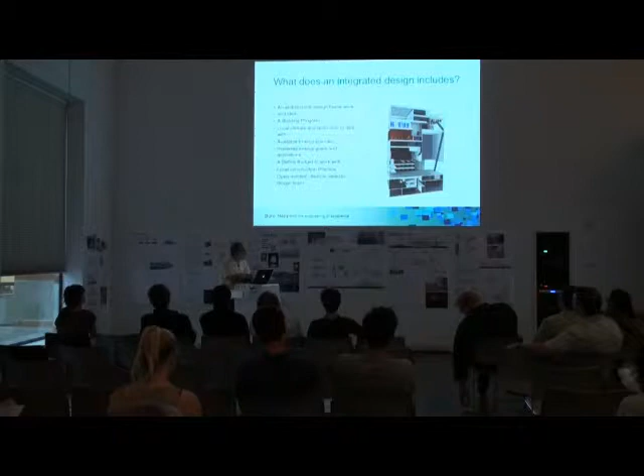These all came somewhat head-on to some degree or another at earlier stages of design, if you really need to take a look at that integrated design and see how that would work out with a typical building or atypical building, in the case of Wyly Theatre or any other highly integrated design buildings.

From our standpoint or from your standpoint, one may think that comfort is all about temperature in the building and getting the humidity out, especially if you happen to be in areas like Houston or, in my recent travel, in Doha, which is basically an intolerable climate for this type of building design. But once you really get beyond it,

a comfort design has many different aspects, and depending on the building, depending on the program, there are different things that one design has to be sensitive about or not, and it may involve many things: noise, or type of use, and areas that we need to take advantage of.

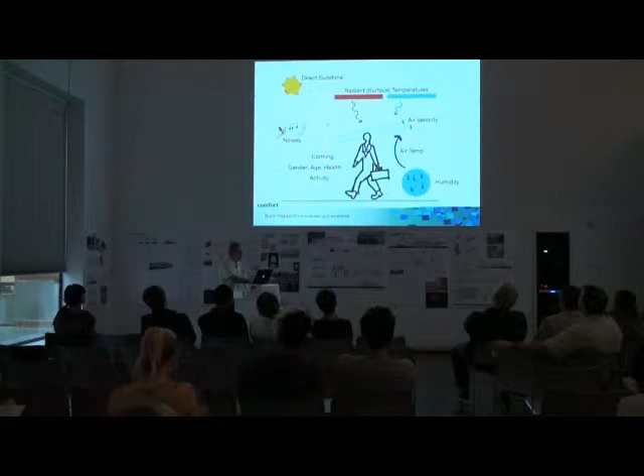Integrated design may vary one degree or another within a building and design, but just start by the fundamental questions that we as designers get involved with and pose from our standpoint to the design team. We need to take a look at the indoor design conditions, the nature of the program that produces or takes the heat out of the building, or produces the heat within the program space.

How do you conceive of providing air conditioning or comfort design for the building? And it goes on to that. How do we construct it? What are the opportunities for construction, and how do we really maintain it? What type of maintenance programs are available for the end user after the design is done? So the integrity of the design remains intact for years to come.

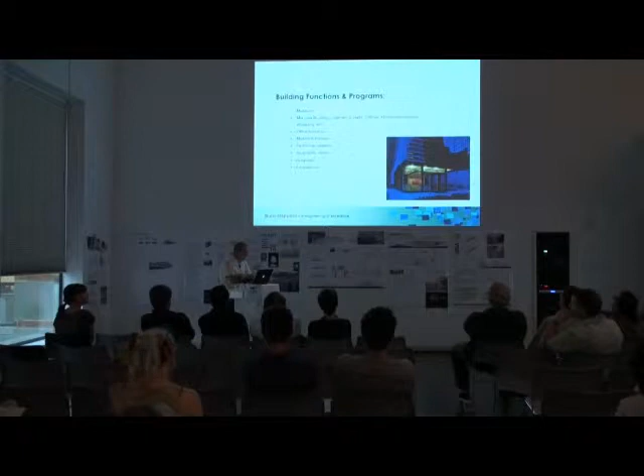For a typical construction, at this stage it is somewhere about 20, and some buildings need to be a good functional building for over 100 years at least. And of course, I think we're all familiar with the fact that there are many different building types, and each one of them really deserves its own attention, and they don't necessarily all function and work similarly.

From the building system standpoint, the critical issues that we need to concentrate on at this stage, from the comfort standpoint, are really the thermal, the visual, the acoustics. From the user standpoint, thermal is probably much more relevant, or acoustic probably is more relevant. From the architect standpoint it is the visual part of it,

and obviously for the owner or the client, really the energy standpoint: if they tend to be the end user as well, how much energy consumption, what energy value the building has later on, and what kind of cost it really has for operation of the building. So these are all critical issues to really consider for the early stages.

And then typically at the concept design, you get to see a vision that is posed by the designer and proposed for the building. And it's really important to understand how this vision works, like for example, this one was the competition rendering from SANAA for the Toledo Glass Museum. It's really a very transparent glass building.

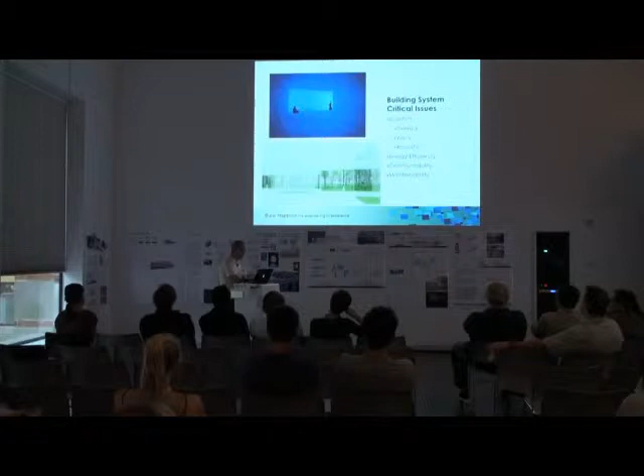This is the vision that the architect really put forward for the building at the competition, and obviously it's very conceptual, and we were tasked to see how much we can really make it a true design for a place like Toledo. So it's important to understand all these issues.

The overall fundamental task for us as building system engineers is obviously concentrated on dealing with ventilation, heating, cooling, and public health and life safety. But obviously there are some items like lighting and acoustics that at one time or another also become an issue for us.

I've come across many studios where students concentrate more often than not on just the program area design, not realizing that a building, like any other functional organism, needs all the background systems in order to function.

This background system could take up to 10%, 15% of your overall building area, depending on the design program. It's substantial. If you propose your building to the client without understanding it early on, it becomes an issue of where to really fit all these elements. So it's important to keep in mind that a successful building design takes into account all these areas from your program, and it's important not to lose track of it.

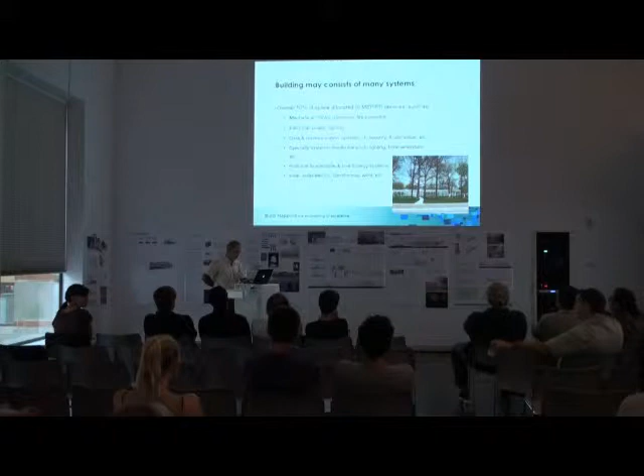A couple of issues to look at from the earliest stages, from our standpoint, is really how we make decisions about certain things. A fundamental decision is how do you supply heating and cooling to the building. These become fundamental questions early on, and it's not a decision purely made by us or you. It's a decision that would be successful to make through a joint effort with the client, because ultimately it's a long-term issue they have to deal with.

So once you look at the system and see if it's an all-air system or a hybrid system, it would impact your overall design. Depending on where you want to go, and what are the available or potential spaces in your building design, it impacts the selection of the systems.

Fundamental question number two: if the building or design you have has somewhat exposed or unexposed structure, it will impact how you incorporate your mechanical system into that exposed or concealed structure.

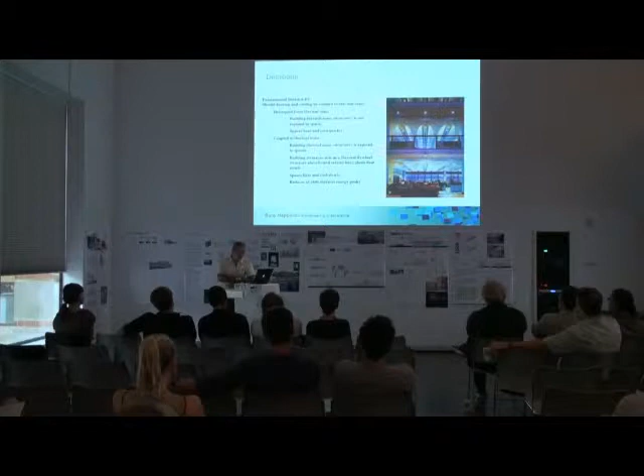So for an overall integrated design, it's important from the beginning to understand what are the possibilities and what are the potentials.

Decision number three that we usually pose and look at in the earlier stages is whether there is a potential for natural ventilation. I've come across this many times working with European architects, where based on their practice in Europe there's a much wider band of tolerance for thermal comfort within a building. They're often surprised with American designers, where a total air conditioning system is always offered, while they tend to gravitate toward a more natural ventilation design. So we need to look at the potential and possibility for natural ventilation and how it impacts not only the internal design of the building but also the external envelope. Each one provides certain answers and questions.

Getting into a little bit of the nitty-gritty of overall building systems, it's important to understand there is a substructure and a superstructure for mechanical or overall building system design. The infrastructure involves energy sources and where those come from, what type of energy sources are coming into the building, and each one will impact your design one way or another. It impacts the infrastructure of the building, areas you may not necessarily expose or show, but it ultimately becomes part of the building area that impacts your program.

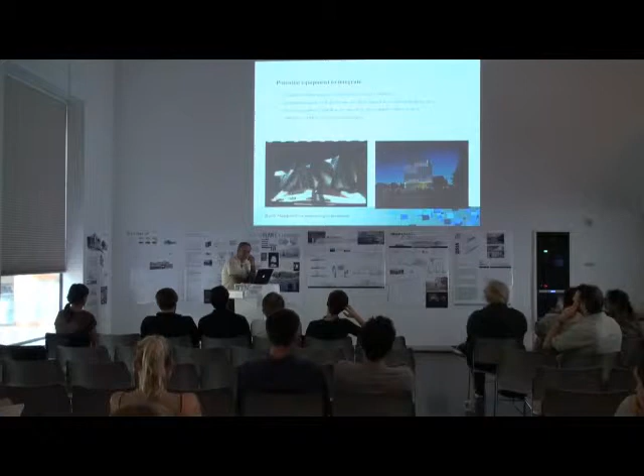There was a similar design to this by Gehry—I think at one of the universities, I forget the name right now. It was a business school where the facade was subject to really extreme temperature and rainfall, and then the temperature drop created a huge mess for post-construction, with ice build-up forming and dropping on the pedestrian area. So it was important to look at these things and see how the actual integration of the systems impacts the facade and the overall exterior design of the building.

In the case of Wyly Theatre, for example, the facade and design was such that it would not provide us with any opportunity for integration of mechanical systems, louvers, or whatnot. So for us it was important to understand how the building is conceived and what are the criteria for the cooling and heating systems for the building, and what we need to consider.

From the program, we were looking at different issues—solar panels, radiant systems, and whatnot—and each one of these was examined at the earliest stage with the designer to see what opportunities should be considered for each building.

Once you look at these things, there are a lot of environmental issues that need to be looked at, and ultimately one or another of these items becomes something we have to look at and examine overall with the designers. One or the other becomes very critical for them.

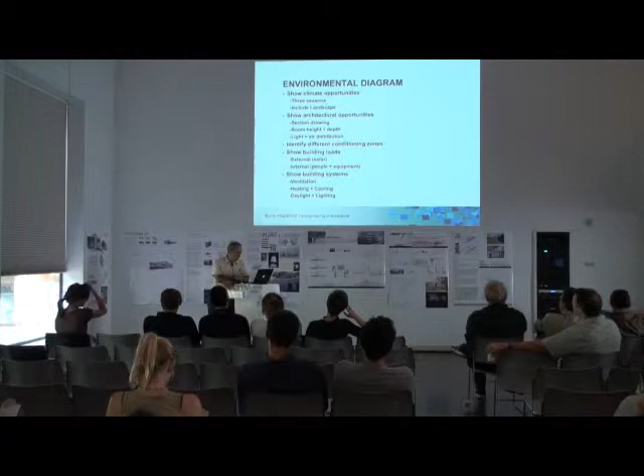So all this will be considered with the designer at the earliest stage, and then we try to really communicate the main factors with them, and work with them in earlier stages on what could be potential for integration of the mechanical system, the MEP system, into the design. It's important to communicate some of this early on to help not only shape the design and the elements, but also help increase the efficiency of the building.

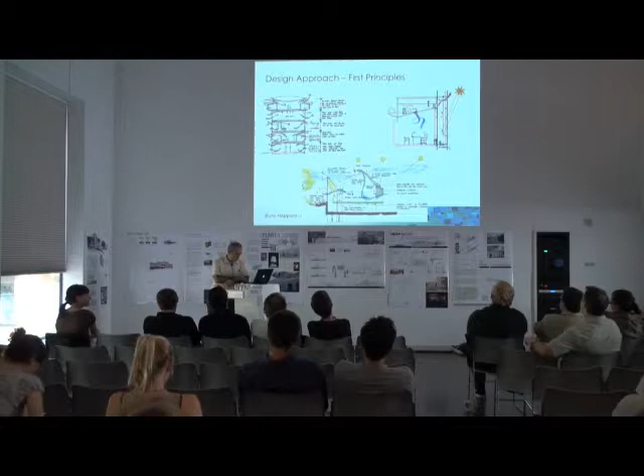Then later on, in the later stages of the design, we again evaluate and go through it more thoroughly to make sure we actually implement some of this. This is a snapshot of the Genzyme building at Cambridge, where the original concept of natural ventilation into the building was studied and looked at, and we followed it through to make sure it gets incorporated into the glass facade.

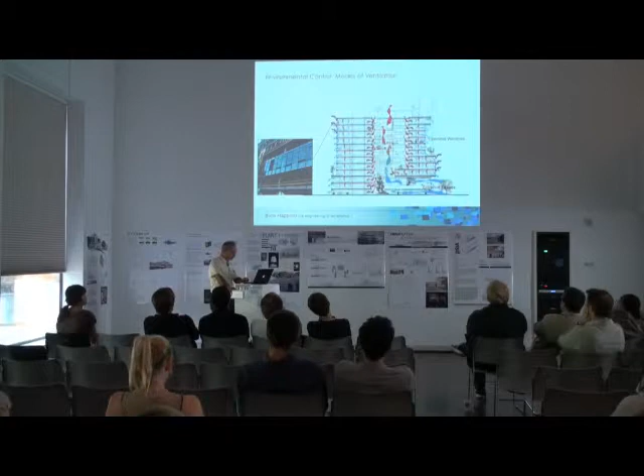The other thing I wanted to briefly go into, as it's becoming more and more an issue, is how do we incorporate and approach sustainable design toward the buildings. For us, it's important not to make it an add-on to the building later on, but to look at it from the earliest stages.

We start from overall elements that help establish a high-efficient passive design, then add potential efficiencies to the system as possible, and then look at the basic potentials for renewable sources that we can add to the building and to the design. So it's important to understand that a high-efficient building should really start from its actual inherent architectural design, then move forward to a high-efficient system, and then to renewable sources.

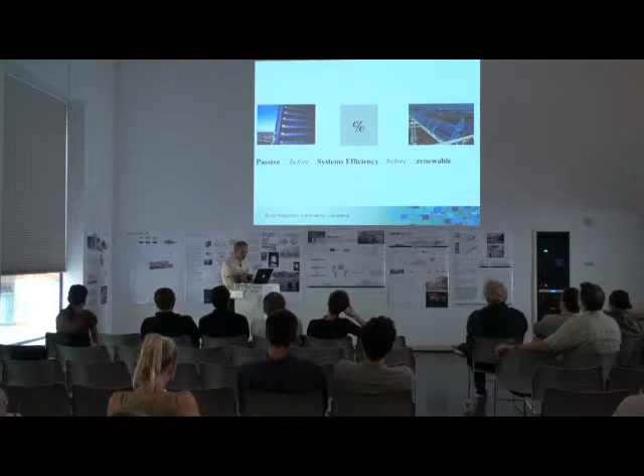So we look at this from the beginning, from the benchmarking and modeling of the system for energy modeling. What is the base design for the area, for the overall region, for the locality? And then we add the passive system, or look into the potential passive system for the area.

For example, in cases of design in very hot and dry climates, such as the Middle East, it's important to understand the passive design and take advantage of it as much as possible. External shading or overall envelope design that provides very high performance is really critical, because although the cost of energy consumption is low, the overall energy consumption is high for a typical building. So ultimately it becomes an issue.

Then, obviously, we'd like to look at the active design elements to reduce that overall energy cost and provide a highly efficient system as much as possible, and then look into renewable sources of energy. These are all elements that ultimately drive the overall consumption of the building down as much as possible, and bring it down to the goals beyond the future 2030 energy model.

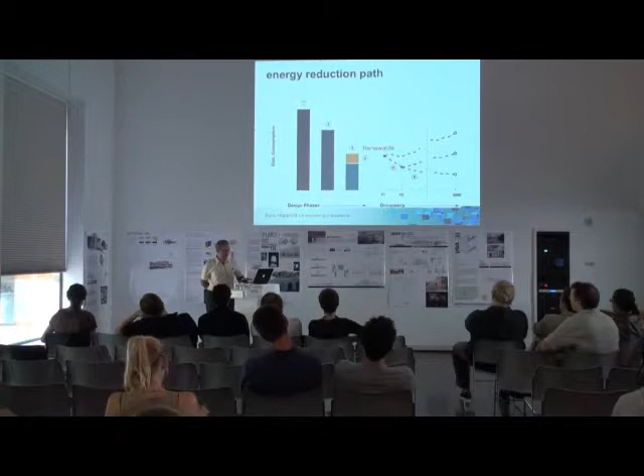As far as the relevant climate controls for the building design, once you look at the building, there are different categories and different requirements. Just as a note, if you look at a historical preservation design or exposed structure, that's one way to look at it, and those are sensitive issues that need to be considered. While if it's a modern exposed steel structure, there's another way of looking at these things, and it provides us with an opportunity. So it's important to understand how we take care of climate control in a building and what type of building you have.

In case of the Toledo Glass Museum, when we started the concept design, we early on understood that it's a building that is totally exposed, totally glass, and it needs to behave differently in summer season versus winter season. Working with the architect on that building, we started developing potentials and looking at the building in a way that helps us integrate design as much as possible from a mechanical standpoint, while making sure the building operates properly. One of the things we started to look at is really the envelope.

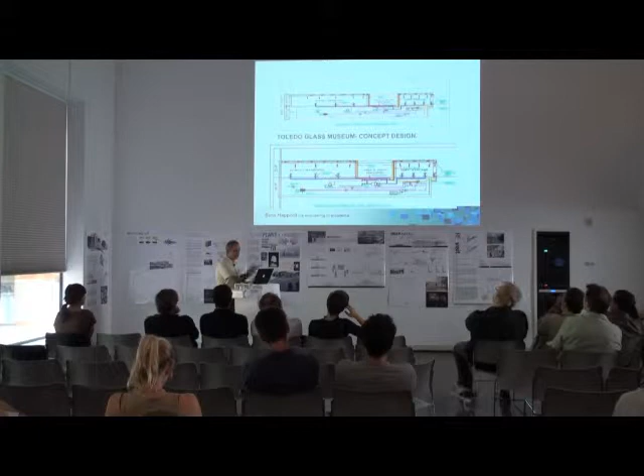But again, we put all these concepts and worked with them in order to make sure that everybody understands what the design criteria are and how we can mitigate and incorporate the design elements into their design, so it doesn't become an overall extension, and instead becomes part of the design.

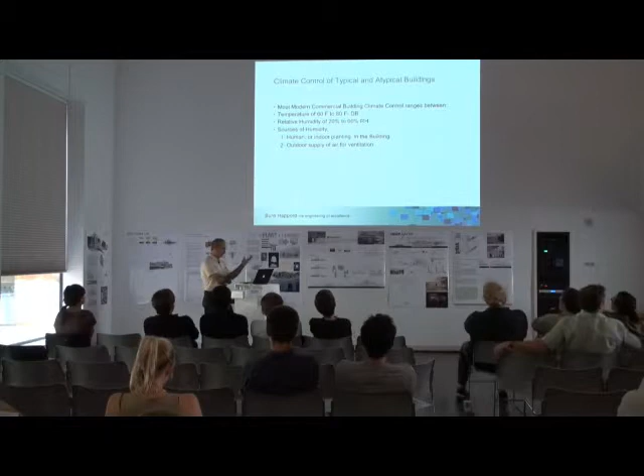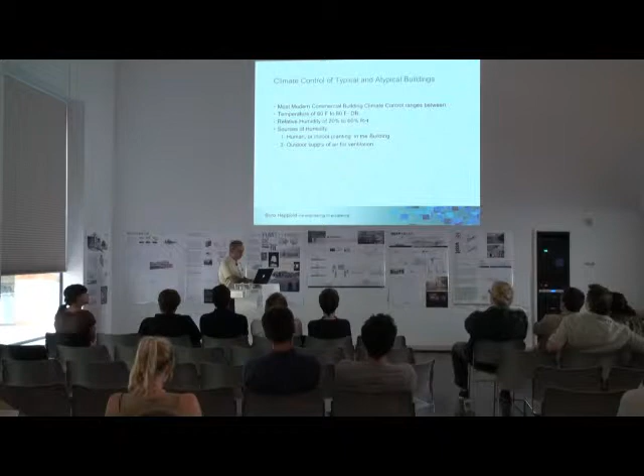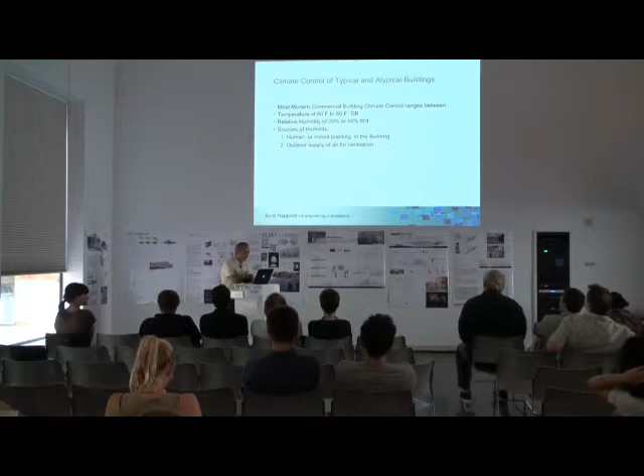So just as a start of evaluation, a building typically has certain design parameters. The temperature is roughly about 60 to 80 degrees, and for relative humidity is somewhere about 20 to 60% relative humidity. The source of humidity becomes very critical - it's either indoor, from humans and plants inside the building, or from the outside air, and how humid the outside air is. Those are the issues I just wanted to point out to you guys.

The typical building that we used to design, or ideas we used to design, was to provide total isolation of indoor versus outdoor. That's usually the approach we used to take as far as building design is concerned.

But as we're getting more involved with the high cost of energy consumption for the building, we tend to look at buildings in a way that moves from a tight area for climate control to a much wider band of area where climate control is relevant, trying to work with the architect early on, programmatically, on how to lay out the areas that work with these parameters better, so we can reduce the overall energy cost of the building.

Just again going to the example of Toledo, we had basically a double wall glass areas with a cavity in here that worked as a buffer zone for our climate control, and it not only provided climate control for the building, but also provided areas, in places like this, which was a shop area, to isolate that area from the outside.

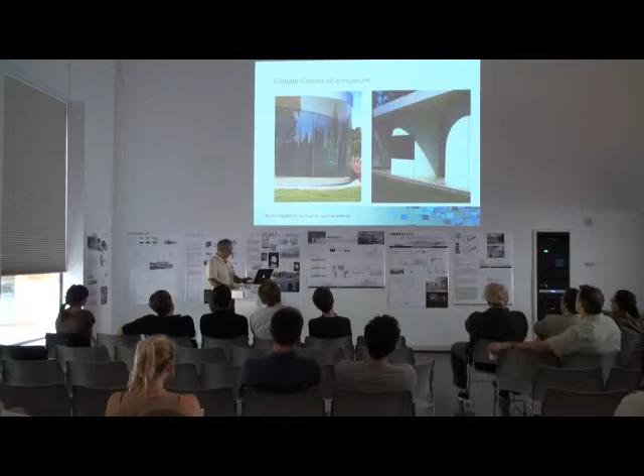The other thing that we were working on at Toledo was the challenge of one side of the building. It's really overall galleries that needed to function based on the Smithsonian standards of 50% relative humidity. But the other side of the building was a functioning hot shop area, and these two programs are very much against each other. And within the inside of the building, we have this area, what they call the foyer in here, which is really somewhat of a buffer zone between one program and the other program.

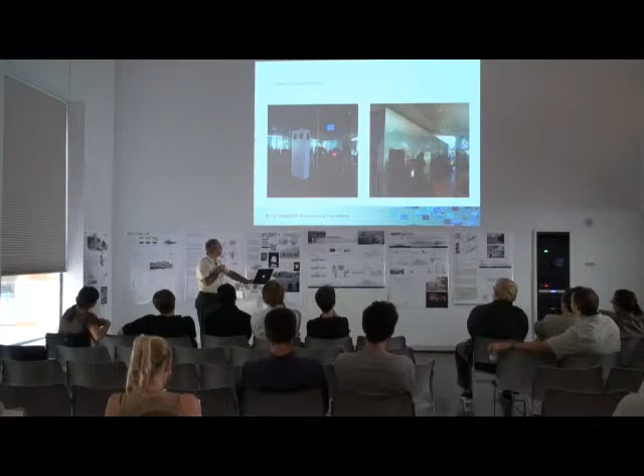But overall, the hot shop area in here was providing a lot of issues for us as far as the radiant heat into the adjacent spaces. And we needed to work very closely to see how we can mitigate that from the energy standpoint and also heat transfer.

The other thing that was really of concern for the architect is the visual aspect of the building communicating to the outside. It was very important for them to make sure that the building is a full clear glass building where visitors from outside can see what's going on inside the building, how the shops and teaching shop areas can be exposed, and viewers can see what's happening from the inside.

And that obviously forced us to locate all of our elements out of the way into the basement and try to serve all the areas from the basement level. Just bear in mind, and I'll get back to this later on, a clear glass building didn't provide us any opportunity for an area such as the hot shop, that has those kilns and elements that can produce up to about 1750 degrees Fahrenheit heat in that area. So it's something that had to be really looked at. It's not a very easy design task for us, if I can say that.

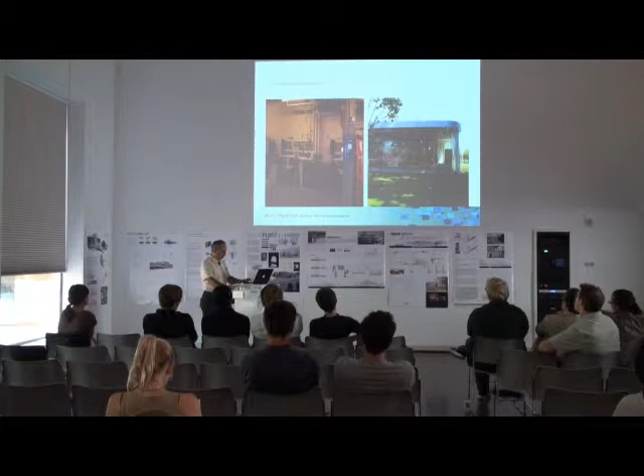One thing that we used at later stages of the design was to take advantage of CFD analysis and CFD modeling to validate our approaches to the design. We studied along with Transsolar engineers the various schemes for the ventilation of the glass and the ventilation of the gallery areas, and how we mitigate the temperature gradients across the gallery versus the outside.

This is just a snapshot of one of the final studies where, in order to minimize the overall impact of the mechanical system in the all clear glass gallery area, we were supplying from the floor as floor displacement ventilation air, while we introduced radiant floor and radiant ceiling panels in the cavity area to reduce the overall ventilation air and the amount of air needed in the cavity to mitigate the temperature gradient to an absolute minimum. Otherwise, this whole area would have been a wind tunnel, as in one of the early proposals that we looked at. So we went through different iterations of the CFD modeling to get to this.

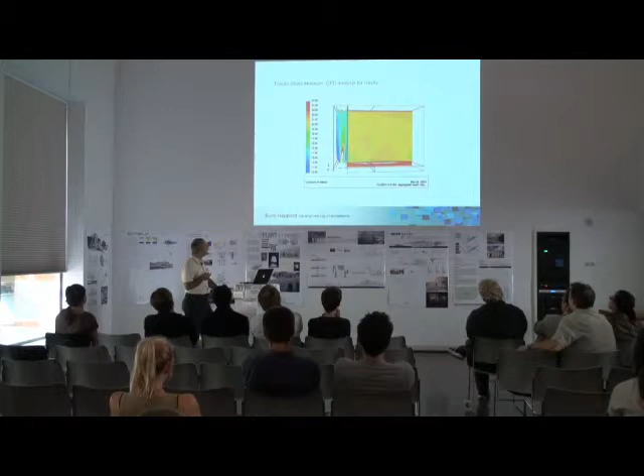And ultimately, it showed, just as a snapshot of one of the thermal gradients, how the temperature along the glass outside versus inside and the internal temperature inside the gallery behave in that mode.

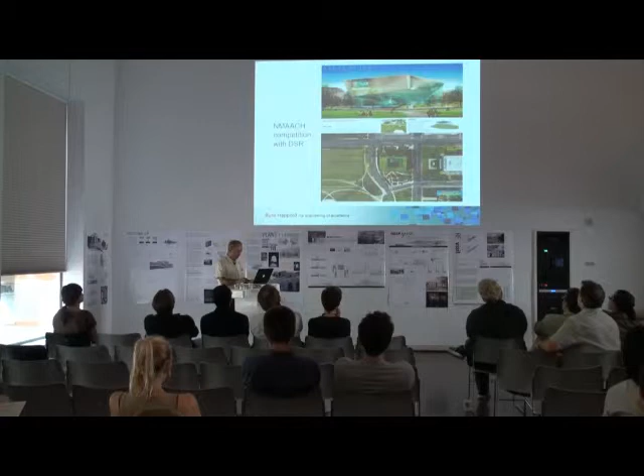Another example that I just wanted to bring up, this is the competition for the National Museum of African American History and Culture with Diller Scofidio. We got involved with the competition, and as you can see, it's a design that basically has an almost fully enclosed structure, but with a skirt of glass coming down and enclosing the building in that area. And that glass skirt is a really high and big surface area for places like Washington to make sure that it's really staying clear and clean as far as condensation is concerned.

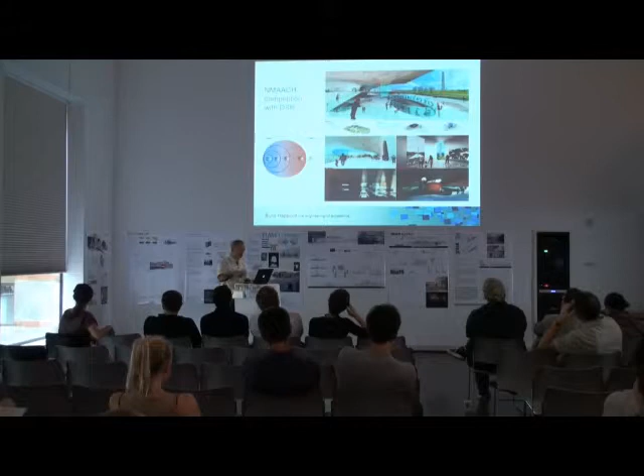So again, this is one of the examples of really working with the designer from earlier stages to make sure how they program the building and where they put their programs, so we can take advantage of the tight areas, or put the galleries with a very tight band in the innermost portion of the building where it's much easier to control, and then bring it out to the loose areas where the exterior of the building can be comfortably met with the outside with just a sheer single pane of glass.

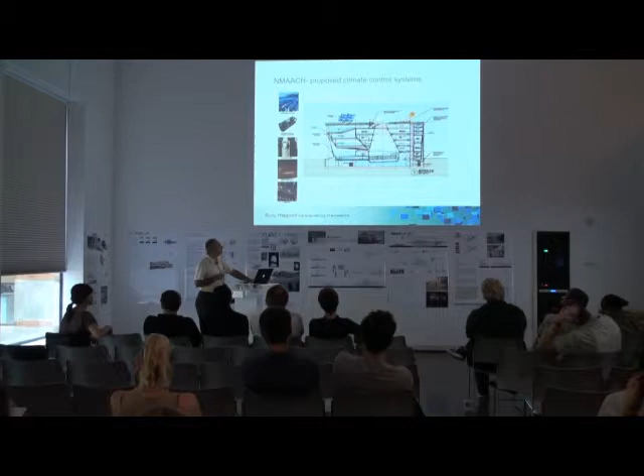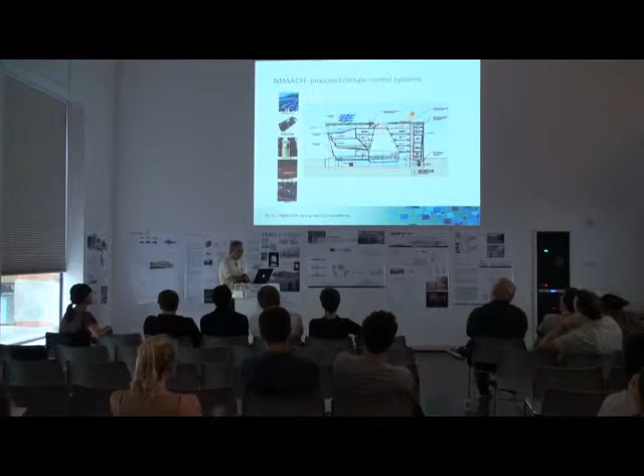There were other issues, as part of the program, we had to consider: how do we integrate the building so it operates nicely to the outside without really impacting the glass facade. In this one we also had the challenge put forward by the competition of how to really integrate a sustainable renewable source of energy, and we integrated some solar panels on the top of the building. We didn't win the project, but it was actually a very nice competition. Hiding some of the renewable sources is always a challenge for the building, and it's important to understand where the opportunities are for us.

Another example that I wanted to bring up: sometimes you end up working with a building that is not a new design, but it's really a renovation of the building. And it's important to understand how the building was constructed, how the building was conceived design-wise, in order to implement your changes and make it better. This, I don't know if you guys know about it, is the GSD, built in the 1970s with a lot of problems. From what I know from some of the original designers who worked on the building, they knew all along that it's problematic, but they let it go at that time, and the students had to live with it for generations.

One of the things that I found out: all these truss covers in here were fiberglass, which to begin with didn't have much insulating value, and throughout the years it basically lost its value. The main trusses are sitting in here, and because these truss covers didn't have much value, in Boston, a very cold environment, these trusses become transfer elements. So what they're doing in wintertime is becoming cold steel radiant panels.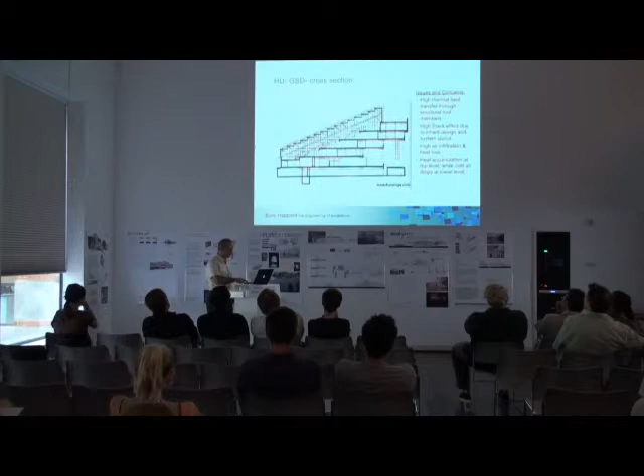The other thing that we talked to them about is really analyzing and reviewing what is the climate control and what are the comfort levels that we need to achieve. It's important for the client to understand there is a band that at times, depending on the program and depending on what you're really trying to achieve, could be really this point in here, if it's a museum and if it's object-oriented, or if it's a certain design program. Sometimes it could be a little bit looser. There's more tolerance in, for example, a building designed for students, or a residential building.

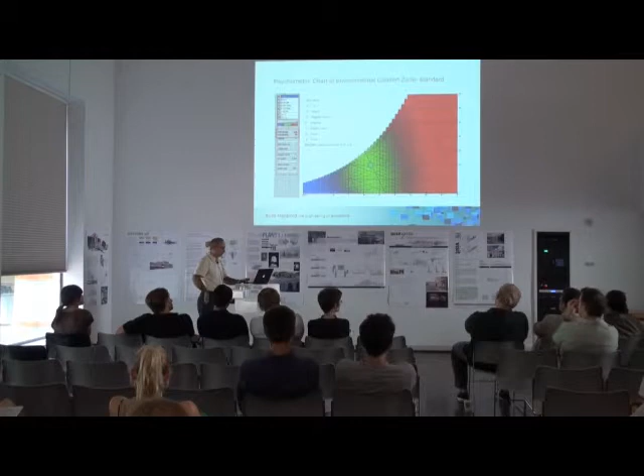So it's important for the client to understand whether they have to really tolerate this type of close climate control, or they can go a little bit beyond it and try to hit something that is a little bit more comforting and has a wider band of control. So one thing that we talked to them about is really discussing what are the important things as far as the climate control of the space is concerned.

I don't have the snapshot of the existing system, but it's a very simple system. It's basically overhead supply of the air, single unit, dumping air from the top in here from the diffusers, and then the return is right here going back into the existing air handler in here. So what it does is the mechanical system is trying to work as hard as it can to cool off or provide climate control for the overall space, whether it's 1 foot from the floor all the way up to the ceiling height, which is about 18 feet or so, or 10 feet, depending where you're standing.

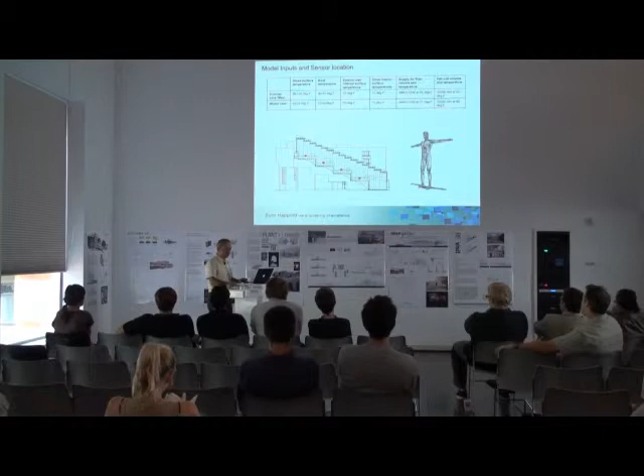So the system is really trying as hard as it can to provide cooling or heating for this large area, which is really glass on 3 facades in a way. And the facade itself at this stage is very inefficient. It has over 2 air changes per hour of infiltration. So you can imagine, however you try to mitigate that, still it's a problematic building. What we did and what we could do was very limited.

We looked at various system alternatives for it. What I wanted to do is provide a combination of radiant system in the ceiling with a minimal ventilation area here. But one of the things that became known to us very early on as part of the study is that in order to implement any system on the ceiling of the building, we had to incur over $1 million worth of structural upgrading. So a system that could have worked really easily and nicely with the building as far as the mechanical system is concerned was so costly on the structure that it was not a feasible option.

The other thing that I looked at was an underfloor or floor displacement system, but the impact on the overall exposed structure construction of the building was such that the building would not allow it to happen. So we ended up with somewhat of a happy medium of providing a system that provides air from the ceiling at a lower elevation, but we take the returns into what they call the under-the-desk area, and provide a reverse direction of the air. So we break down that high stack air movement that takes the hot air all the way up in here and creates a very uncomfortable situation in the upper level.

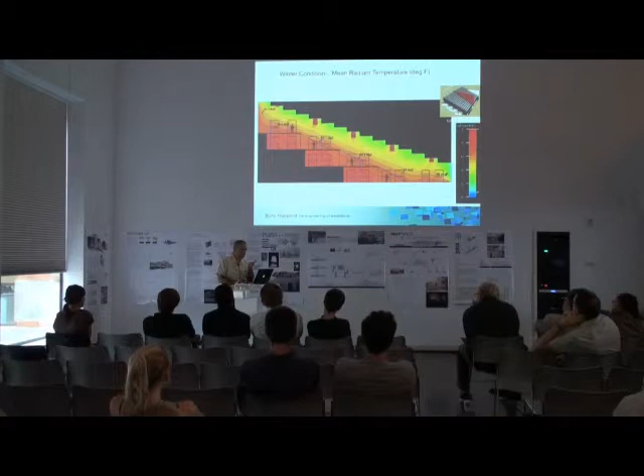So just imagine that it's a remedial integration of a better system into this existing design. I just wanted to make sure that you understand it's not everything optimal, but basically we have to work with what is possible for us.

A couple of issues as far as the integration of the interior design element. It's not all about energy, it's not all about efficiency of the basic building system, but how we can integrate that into the interior of the building. And it's important to understand from the architect what the concerns are, what they can tolerate and what they cannot tolerate. In Toledo Glass, obviously the clarity of the facade was one issue, but they were very concerned overall about what they see on the floor and what they see on the ceiling.

And the other thing, obviously for SANAA, everything has to be minimal as far as the visual is concerned. By putting a radiant system in here and in the ceiling, we reduced the amount of overall ventilation air and airflow to a minimum. So basically, the overall design of the diffusers and airflow system was reduced to very small pieces. I don't know if you can see that or not, but there are just very small radial diffusers every now and then in the cavity area, and the rest is fairly clear.

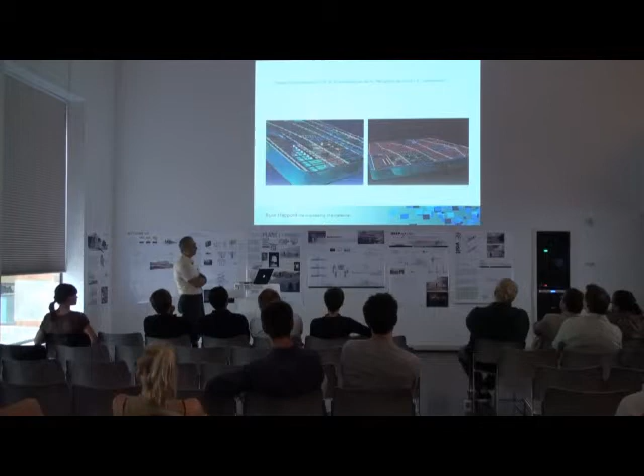So we again did a CATIA 3D modeling of the overall roof area, and I think it took us about 12 modeling to make sure that all the pipes pass in the right place, where basically we're not impacting the overall structural elements while we're passing through the structure into beam cuts or beam notches where it's allowed. And we had to move pipes back and forth in the area to make sure that basically the structure stays intact as far as the load is concerned.

Mark, go ahead. Can you show us how many places are there? You talked about all the problems in the horizontal plane, but vertically, where are the chases that you could bring all those systems up from the basement?

And we had to basically make sure that the pipes, and obviously this is a very large roof, because of that guideline of the 20 inches of thick solid area available for all the roof structure, the roof was very flat, inverted pitch. But the inverted pitch that was allowed for us was somewhere about, I think, 3 or 4 inches at maximum. It's a long-time memory.

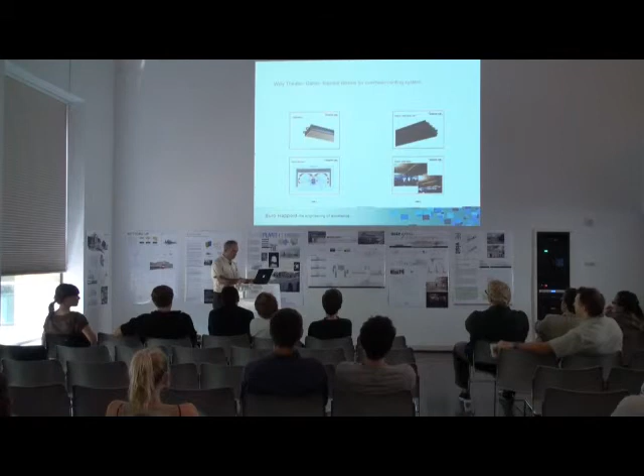From the early on, from the vision that the architect had for this area, it's important to understand what the interior space needs to be and how we basically work toward that. Just a couple of elements that we utilize for various parts of the building in order to reduce the overall requirements of ventilation and airflow was, in this particular example, a radiant system.

So what we created is basically as much radiant panels as possible, incorporating them into the lobby and into the performance area, to take the overall heating and heat rejection of the space out, in order to reduce the ventilation. Those embedded in the slab?

No, those radiant panels that I just showed you are actually exposed panels. But for the overall hall area in this particular design, we had an open ceiling area where basically we embedded the radiant panels underneath of the stage gallery and walk-in areas, galleries on the top. Underneath of those galleries, they have radiant panels that take care of the glass facade in the Wyly Theater.

This is one of the rehearsal areas. Again, here we introduced and incorporated radiant panels in the open structure between the light areas in order to reduce overall ventilation and airflow requirements for the building, and to keep all the walls, ceiling, and floor as clear as possible. But it was a very interesting integration of the systems into the overall building interior design.

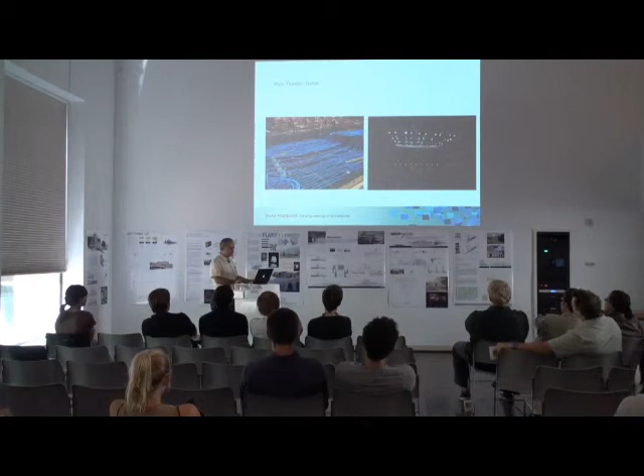A couple more snapshots of the Wyly Theater. This is the shot from the floor area. Again, radiant floor panels and ceiling, trying to show the actual radiant ceiling and chill beam in the area. This is a smaller version of an overall glass building.

It was an addition between two buildings at Columbia University, a student center, and basically it's a glass box. You don't see the glass ceiling because we provided perforated glass panels in the ceiling to reduce the overall solar load into the area. So what it does is provide as much clear view as possible when you're standing underneath of it, but it cuts back on the solar load in the area.

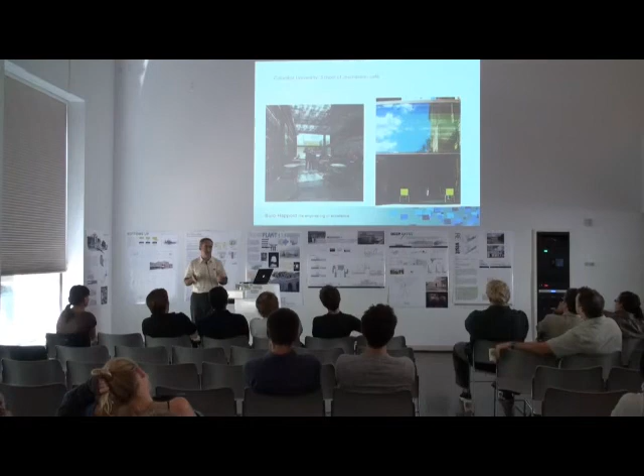And then the overall facade was basically two moving glass panels that provided the design with the opportunity for natural ventilation in autumn and spring when the weather is good. But what was important for us was that when it's closed, it had to really behave like a fully enclosed glass structure.

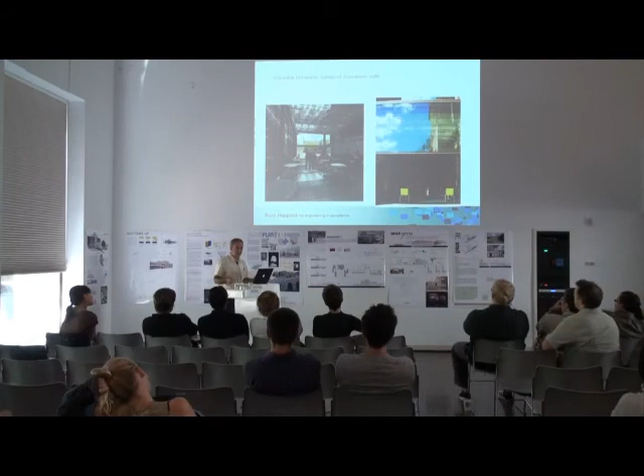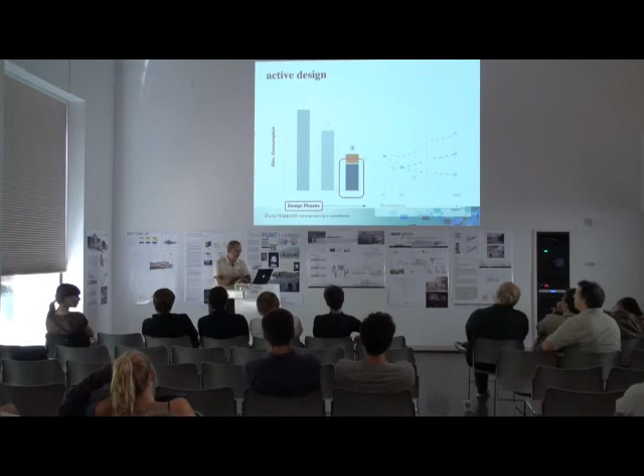So just to finish it off, I'm sure you're all aware, but these are up to now what we talked about. It was mostly elements for a high efficiency design system, and something that is becoming more and more important for us is the integration of high design buildings with overall active renewable sources.

At times it's becoming an issue for us as far as integration is concerned for the design, and it's important to understand from early on if we have the opportunity or mandate for it. For example, building design in Saudi Arabia or Qatar, where we have to meet a gold LEED or silver LEED mandate, somewhere between 10 to 20% above the ASHRAE benchmark. It's very challenging to really reach those percentages with just overall passive or active design systems.

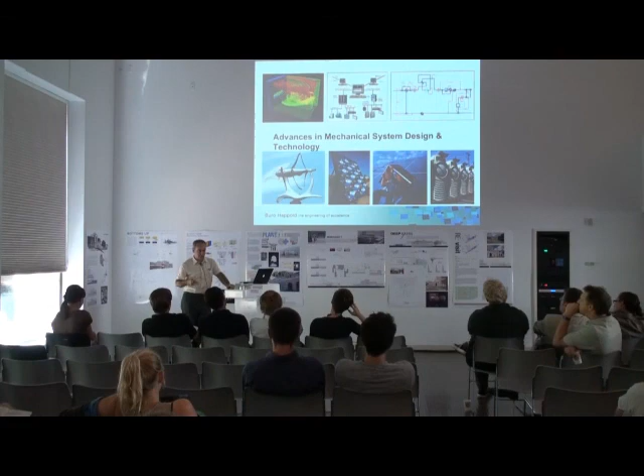Ultimately, it's important to introduce renewable sources even in those areas, as cheap as energy sources are there. But in order to make sure these elements are not just tag-along pieces all over the building, it's important to understand this from the early on and try to incorporate it into the building. And of course, for active design buildings, the concentration is really on all commercial types of buildings, not just highly designed buildings.

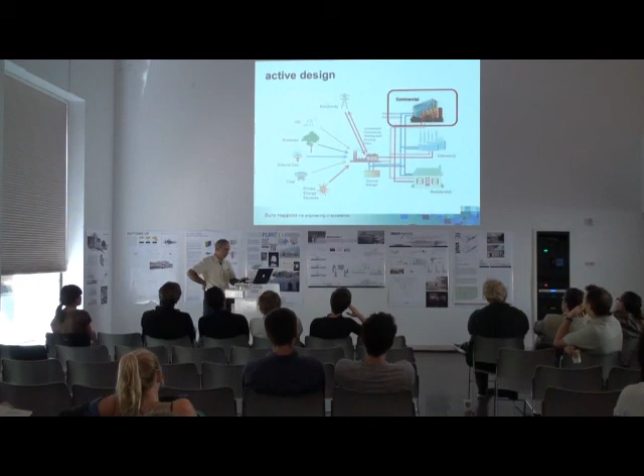Just to finish it off, if you can imagine the overall building design as far as consumption is concerned, if you look at the consumption of the building and the percentages, you can imagine how this can impact the overall building consumption, and how active design buildings can be really important for us. I'm going to stop here.